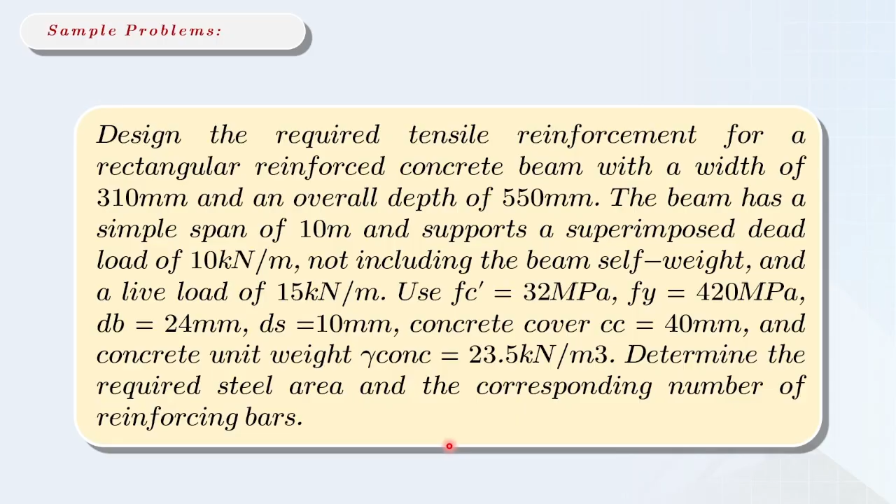Okay, so this portion of the class is also a design for our singly reinforced beam. What we can do here is find how many bars will fit in our tension area, especially on this part. Since the given here is a simple supported beam, the maximum capacity of our moment will occur at the midspan, where our compression is located at the top and our tension is located at the lower part.

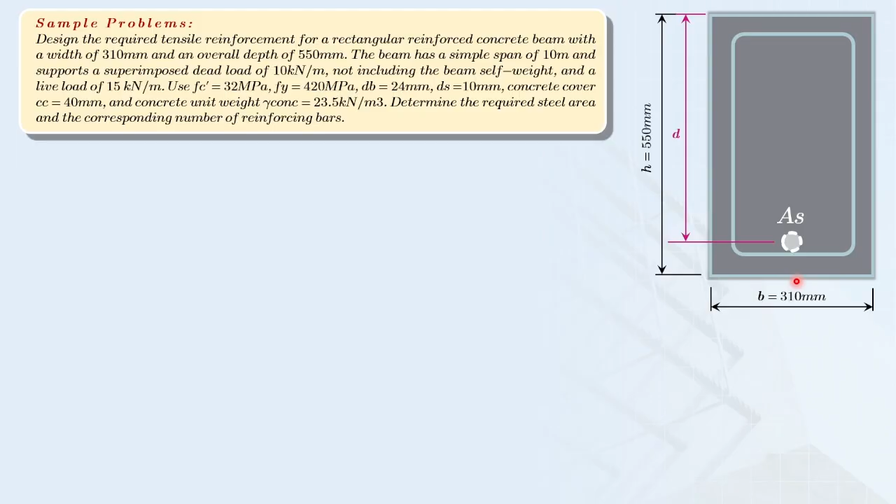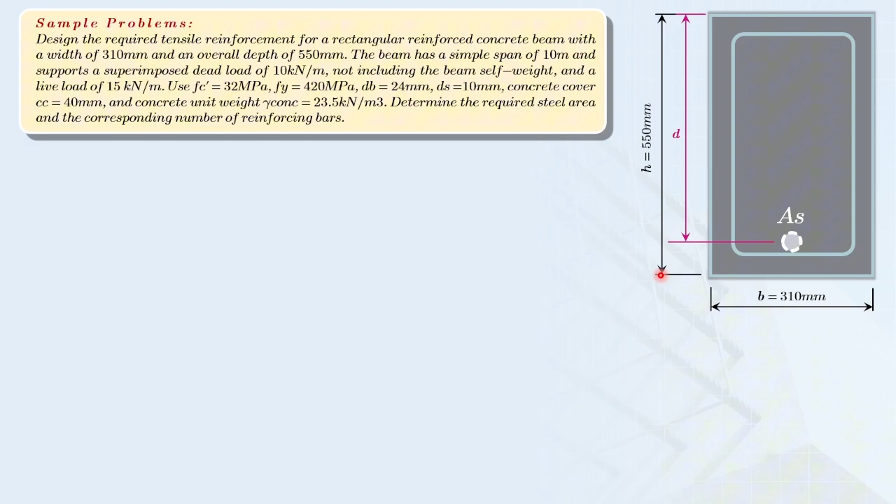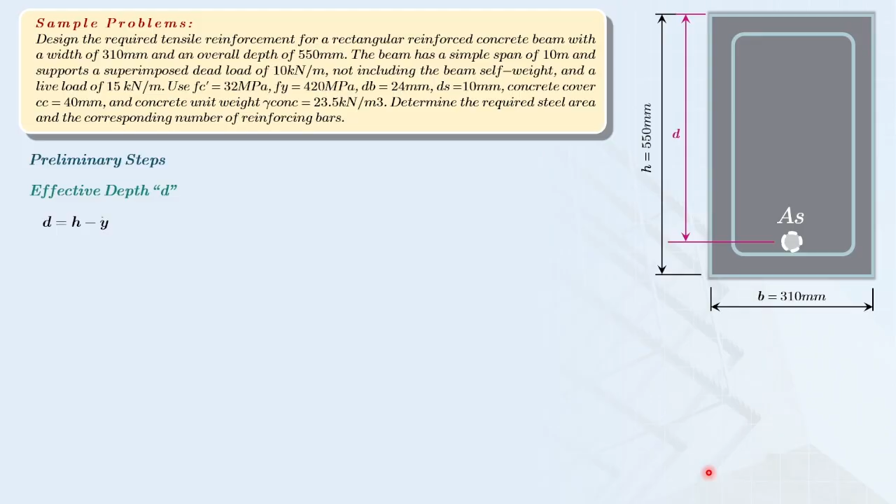So given the width which is 310 millimeter and given the overall depth, don't get confused with our term effective depth, which is the location coming from compression up to the tension - this will be our preliminary step. So we need to determine first what is the effective depth, which is simply the total height minus the location of the centroid.

Of course, for the location of the centroid, it is best to assume that this is a single layer. That's why the formula we will use for the location of the centroid for our tensile reinforcement is this: concrete cover plus diameter of stirrups plus half of the diameter of the main reinforcement. Substituting everything, we have 550 minus 40 plus 10 plus 24 over 2. So our effective depth is now equal to 488 millimeters. This is what we will use all throughout our design.

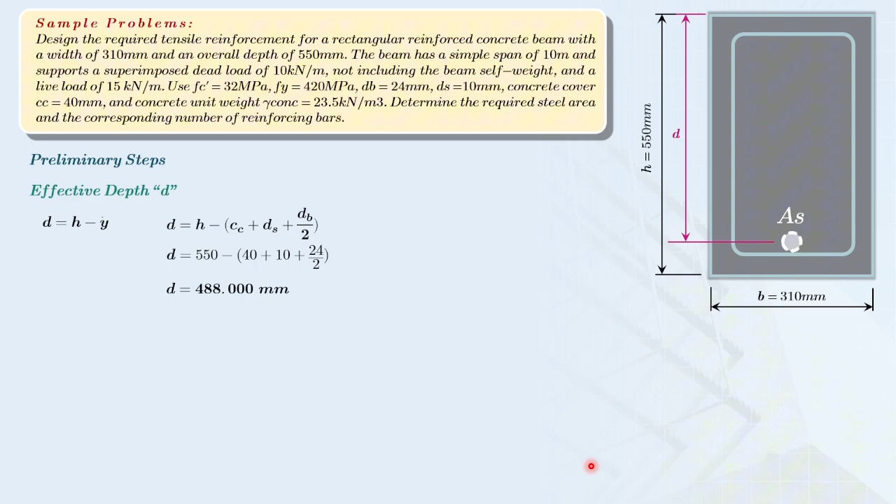So the next preliminary step we need to consider here is the determination of our beta 1, or the stress block factor, coming from table 422.2.2.4.3. By simply using this criteria, which is dependent on our F prime C - our F prime C here is equal to 32 megapascal, that's why this will now fall in between 28 and 55 megapascal. Since our 32 megapascal is in between 28 and 55 megapascal, this formula is what we will use.

So we will use beta 1 here which is 0.85 minus 0.05 multiplied by our F prime C minus 28, which is 32 and 28 megapascal, and after that we need to divide it by 7. So our beta 1 here is now equal to 0.821. So our design strength moment - since we already got our beta 1 and we have our effective depth...

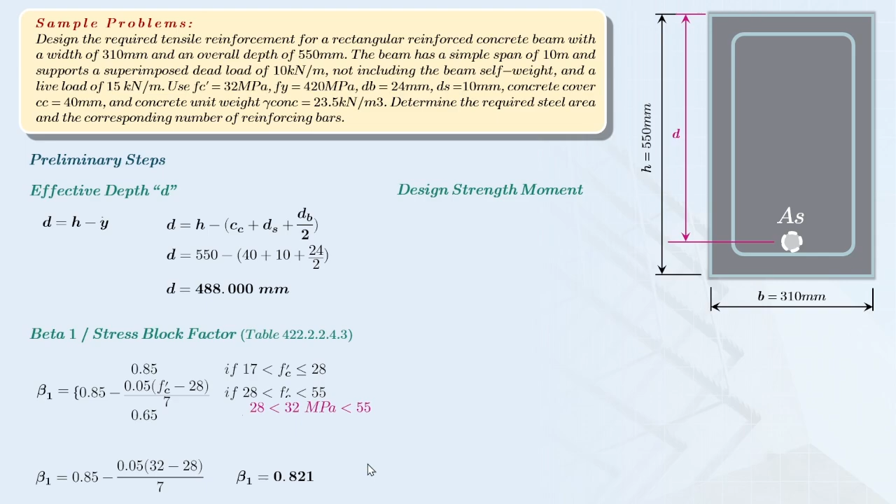To get our strength design moment or the bending moment we will use, since it is not given in our sample problem, what we can do here is we need to consider first our load cases.

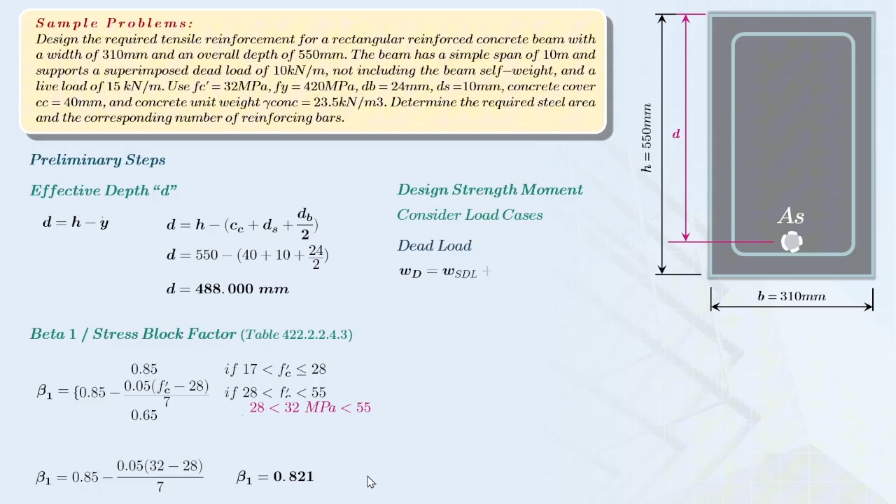Two load cases were given to us. First is the dead load - we are given the superimposed dead load and then the self-weight. Since it's mentioned in our problem that the given dead load does not yet include our self-weight, we need to add the self-weight to the superimposed dead load. Of course, the self-weight here is the self-weight of our concrete beam.

To determine the self-weight of the beam, what we need to do is multiply the given concrete unit weight by our section or our area. Of course, since the linear distance is in terms of meters, the linear distance in our area should also be in meters. The given is only in terms of millimeters.

So let's substitute the givens to get the total dead load. Our superimposed dead load is given as 10 kilonewton per meter, plus the self-weight of the beam. Since our beam is concrete, we will use the unit weight of 23.5, then multiply it by the cross-sectional area. Please take note, that's why you see here 1,000 raised to 2, because we convert the square millimeters into square meters.

That's why if you add this overall for our dead load, this is now equal to 14.007 kilonewton per meter. Of course, since we have a dead load, there's also a live load mentioned. But for our live load here, we will just use the given value itself, which is 15 kilonewton per meter.

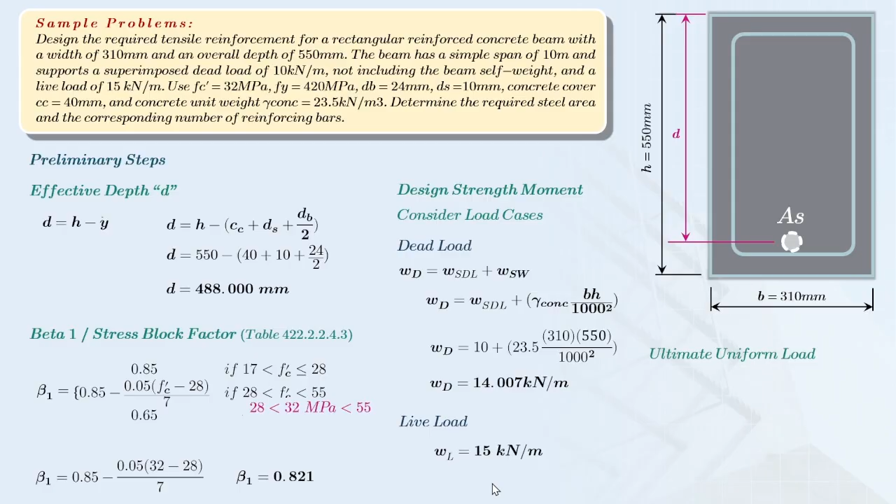So to get the ultimate uniform load, since we are designing and the bending moment is not given directly, we need to derive it. The uniform loading used to get the ultimate moment should be in an ultimate condition. Since we have dead load and live load, the load combination we will use to get our ultimate uniform load is 1.2 dead load plus 1.6 live load.

By the way, the load cases we considered here are simply in terms of service load. This means it is not yet factored, so we need to apply the factors to get the ultimate load or ultimate condition.

Let's substitute our dead load and live load so that our ultimate uniform load is now equal to 1.2 times 14.007 plus 1.6 multiplied by 15 kilonewton per meter, giving us an ultimate uniform load of 40.808 kilonewton per meter.

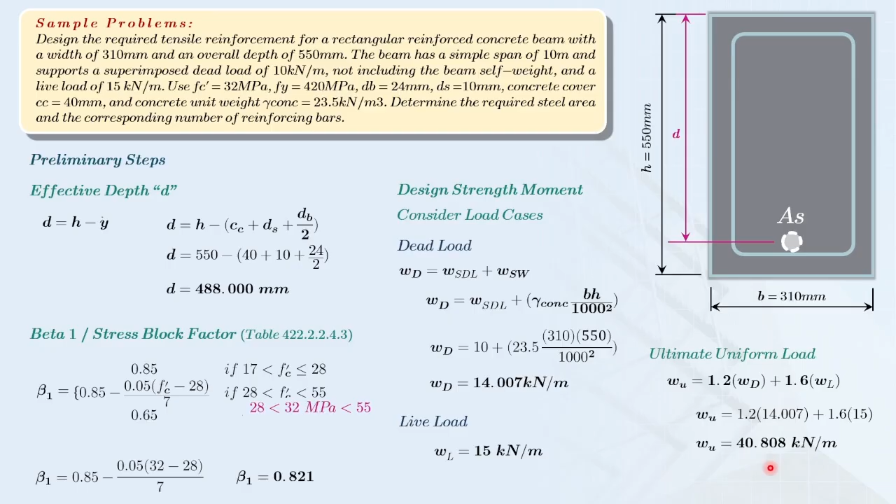This means, class, this is the uniform load we will use to get the bending moment for our design. Of course, it should be in an ultimate condition.

Please take note, the beam given to us here is a simple supported beam. So since we have a simple supported beam, to find the ultimate or maximum bending moment, what you can do is draw a moment diagram, as from your theory of structures.

However, it will take some time to determine the maximum bending moment that way. So to reduce that time, what we need to do here is use a simple, derived formula to get the maximum bending moment.

Of course, we should be in an ultimate or design condition. This means the maximum moment is equal to the uniform load times L squared, the length of the beam squared, over 8. This formula is applicable only for a simple supported beam together with a uniform load.

Because if the loading condition changes, and the supports on the beam also change, our formula for the maximum bending moment will change as well. So for our simple supported beam with a uniform load, this is the corresponding formula we will use.

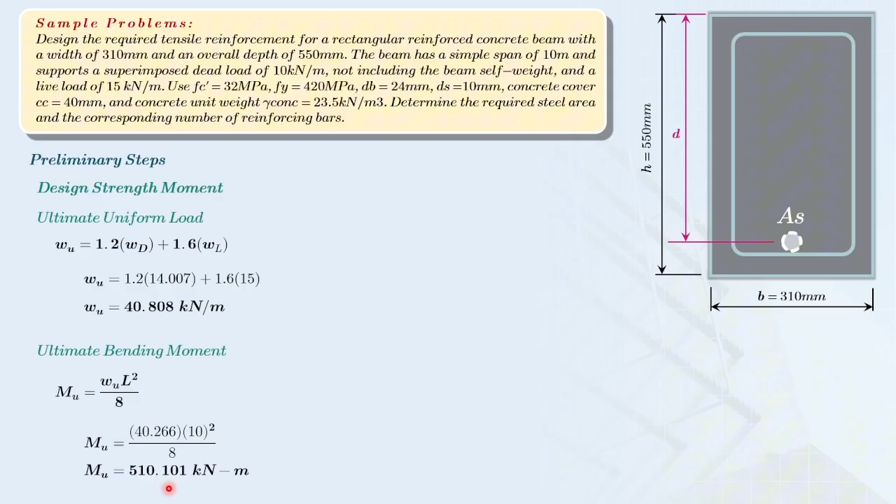So let's substitute the given values: 40.808 multiplied by 10 raised to 2, over 8. So our ultimate bending moment that we will use in our design is now equal to 510.101 kilonewton meter.

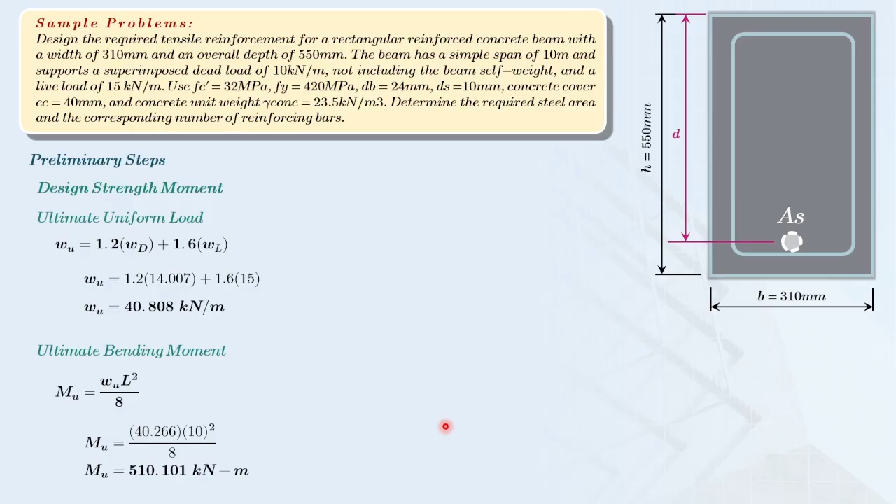This means, class, this ultimate bending moment value is what the number of reinforcements we use should be based on. So we can now proceed to our first step, which is determining the steel ratio limits.

Of course, we will use two limits here: the upper limit and the lower limit. Our upper limit is the maximum steel ratio, given by this derived formula: 3 over 7 multiplied by 0.85 multiplied by F prime C multiplied by beta 1, divided by our yield strength. Substituting the given values, our maximum steel ratio is now equal to 0.0228.

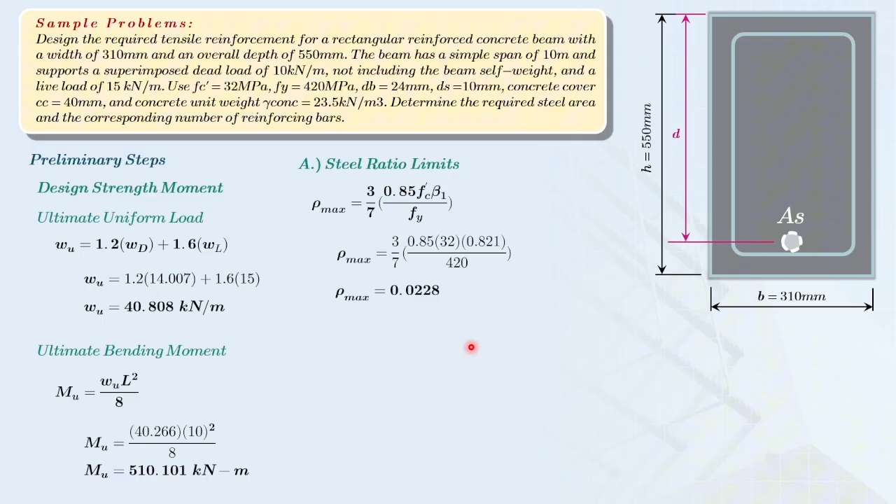Of course, we also need to determine the minimum steel ratio. However, in our code provision on reinforcement limits, we have two formulas for minimum steel reinforcement. Our first minimum steel ratio is equal to the square root of F prime C divided by 4, multiplied by the yield strength. Substituting everything, we get 0.0034 for our first minimum steel ratio. We will also have a second minimum steel ratio using 1.4 over yield strength.

Substituting the given values, our second minimum steel ratio is 0.0033. According to our code provision, to choose the minimum steel ratio to use in conjunction with our maximum steel ratio, we need to choose the largest among these two values.

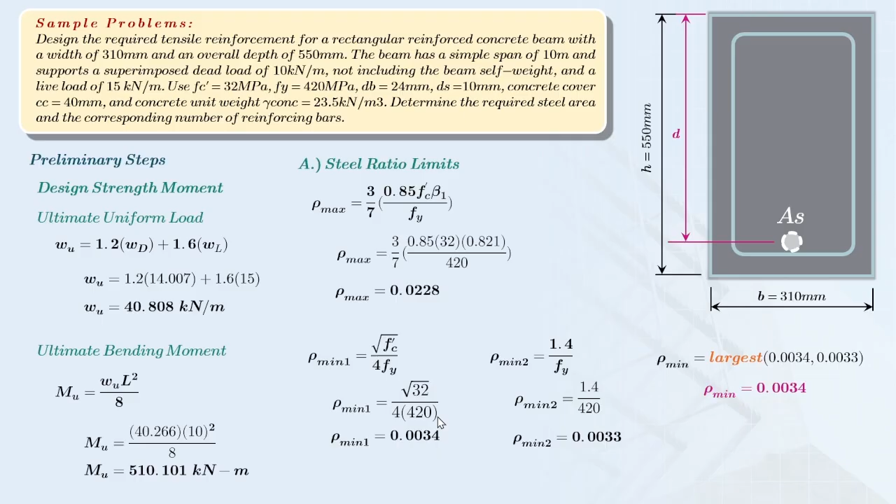And very obvious that our minimum steel ratio that we will select is equal to 0.0034. So ibig sabihin lang po niyan class, sa ating steel ratio limits, kailangan kapag nakuha na natin yung ating actual steel ratio, we need to compare if this will be lower than our minimum steel ratio, or baka lumagpas na siya sa ating maximum steel ratio.

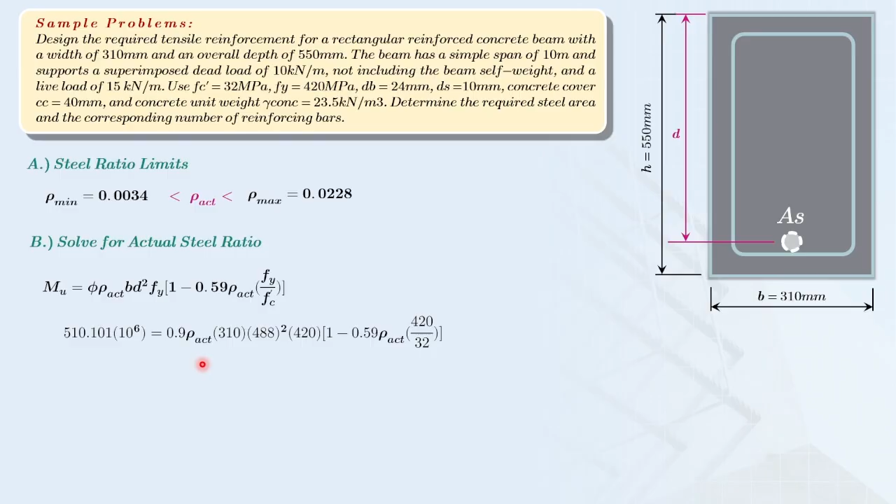Which is magiging second step natin. Our second step here is we need to determine the actual steel ratio. So obviously, ang pinaka-essential lang dito na given is yung ating given na bending moment. That's why using this derived formula para makuha natin yung value ng ating actual steel ratio, and then we need to substitute yung mga nakuha natin kanina. So on this substituted equation natin, isa na lang po yung ating unknown, which is the actual steel ratio. So our actual steel ratio is now equal to 0.022.

However, hindi pa tayo natatapos dito kasi class, we need to compare once again with our steel ratio limits. So as you observe dito sa ating comparison ng actual steel ratio and minimum steel ratio, lumalabas dito class na yung actual steel ratio natin ay hindi pa siya lumalagpas, or di pa siya bumababa doon sa ating minimum steel ratio. Na ibig sabihin lang po niyan class, okay po yun. Kasi nga class, kapag mas mababa yung ating actual steel ratio sa minimum steel ratio, ang pinakang gagamitin natin overall in our design is yung minimum steel ratio. Pero since hindi pa nga siya bumababa sa ating minimum steel ratio, satisfies pa rin yung ating condition.

However class, ito yung kailangan ninyong tignan. In comparison with our maximum steel ratio, yung ating actual steel ratio ay hindi pa siya lumalagpas dito sa value na ito. Kasi class, sabi ko nga kanina, kapag lumagpas yung ating actual steel ratio sa maximum steel ratio, ibig sabihin lang po no, yung beam section natin, you cannot no longer design this as a singly reinforced beam. You will now design this as a doubly reinforced beam. But since na-satisfy yung condition natin for our steel ratio limits, we will still stick sa ating singly reinforced beam design.

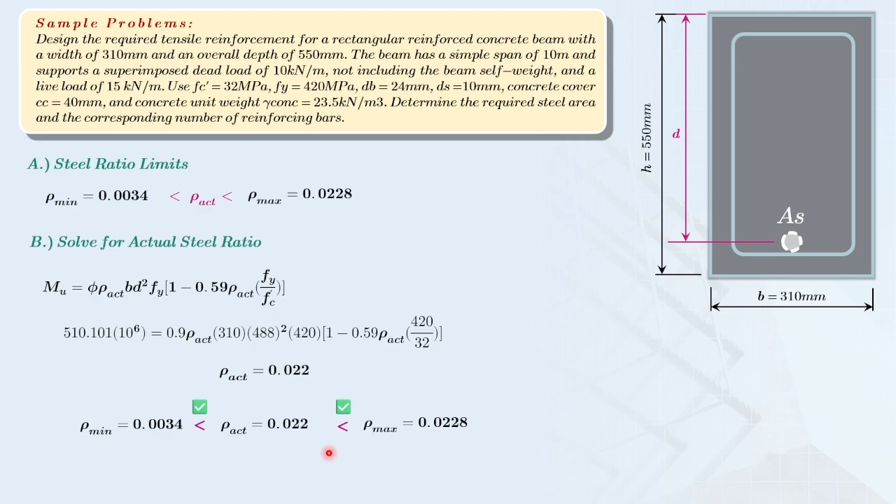Okay? So after that, kapag nakuha na natin yung ating actual steel ratio na gagamitin, yung legitimate value, what we can do here is we need to determine the number of rebars. Especially, ilang 24 millimeter diameter yung magkakasya dito sa ating beam. So of course, para makuha muna natin yung total steel area, what we need to do here is we need to recall on the formula for our steel ratio. Steel ratio is equal to the total number of main reinforcement, yung area itself, divided by the gross area.

Yung gross area natin dito, recall lang na ibig sabihin ng gross area is area bounded by our effective depth. That's why yung derived formula ko dito is width of the beam multiplied by effective depth. So cross-multiply ko lang para makuha ko directly yung total steel reinforcement. Total area of steel reinforcement. Then substitute lang natin yung mga values which is the actual steel ratio which is equal to 0.022, width of the beam which is equal to 310, and our effective depth which is equal to 488. So our total area of steel reinforcement, this is now equal to

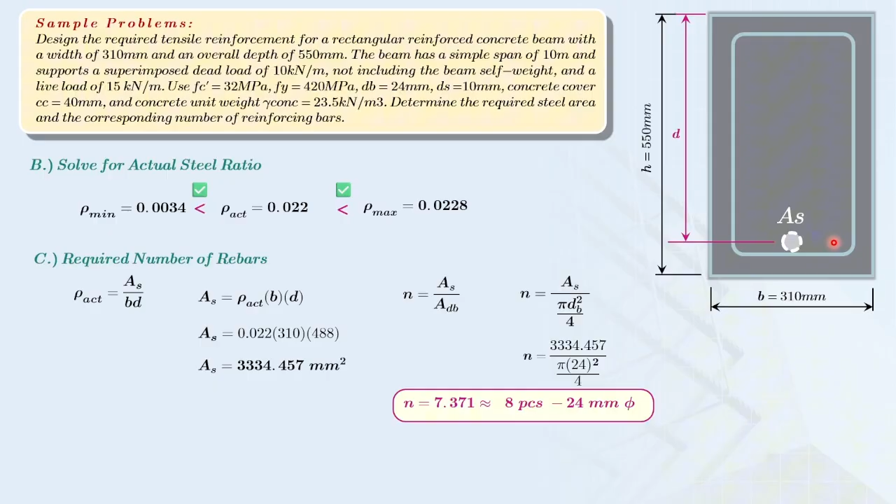3,334.457 square millimeters. Okay, ibig sabihin lang nito class, itong tensile reinforcement natin, ito dapat yung total area na kailangan niya. Dahil nga, kapag sinubstitute na natin siya dito, at para makuha na natin kung ilan yung piraso, i-divide na lang natin siya sa individual area ng ating 24 millimeter reinforcement. So by simply substituting, ang makukuha na natin ditong number of total reinforcement is 7.371. Of course, kailangan natin siyang i-round up, so that you will use here 8 pieces. So ibig sabihin, yung magkakasya dito, assuming sa ating single layer, is 8 pieces of 24 millimeter diameter of our reinforcement.

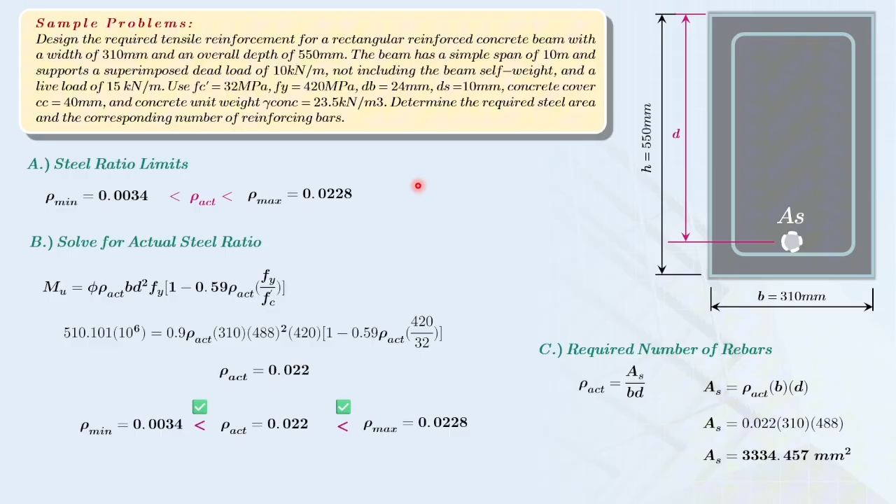Emphasis lang natin na kapag kayo ay magde-design, especially using this bending moment, please take note na may gagamitin kayo ditong reduction factor. But since we are designing here a tension controlled section, dapat yung gagamitin natin ditong value for our reduction factor is equal to 0.9. At saka yung ating yielding strength dito, dapat yung yielding strength na given sa problem. Kasi nga, sabi ko nga kanina, kapag tayo ay magde-design ng simple singly reinforced section, as much as possible, kailangan maging tension controlled, or should I say, maging under reinforced, para at least unang muna mag-yield yung ating steel bago yung ating concrete. That's why yung naging answer natin dito for our tension controlled section, this is now equal to 8 pieces of 24 millimeter diameter.